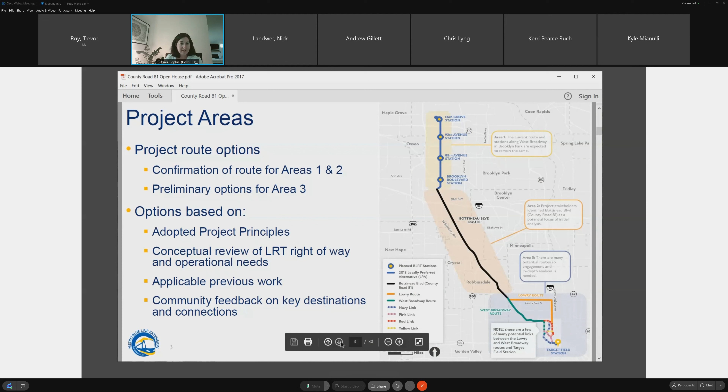The blue line is part of our overall metro system. If you get on a station in Robbinsdale or Crystal, you can connect all the way down to Mall of America, the airport, anywhere along the line, as well as within the blue line itself, or transfer trains to get across our region. This is part of improving transit for our region with fast, frequent, reliable service that you don't need to schedule for—just hop on and get where you need to go almost any part of the day.

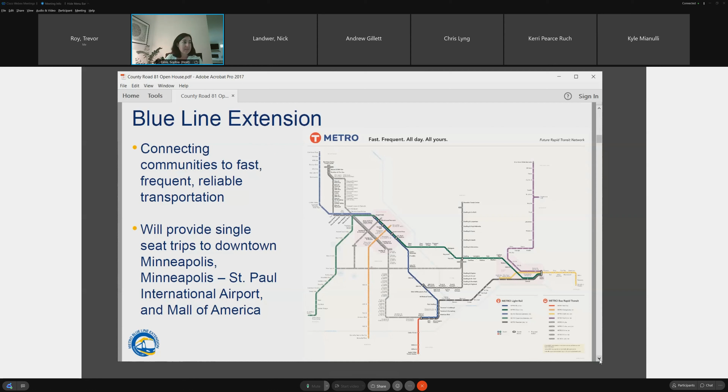So where our project is, we're in the process of identifying a community-supported alignment. Going back to that map, we had a project before, and after negotiations with the railroads stalled out, it was time to make the decision to move forward and find a new solution. That solution-finding path is what we're doing this year, maybe even into early next year.

But that doesn't stop our project development process. We'll still need a couple years to advance our environmental documents, clear and disclose everything along these new routes, and get plans ready for design and construction. Getting those engineering plans up to speed takes a little bit of time as well, and once we're in construction, it'll be another 3 to 4 years to build everything, test and install systems, and all that kind of stuff.

So if everything goes speedily through all of those steps, we had hoped to open the line in 2028. That gives an overall feel of what to expect. This year we're still working on the details, and you can expect us to come back for additional conversation as we go.

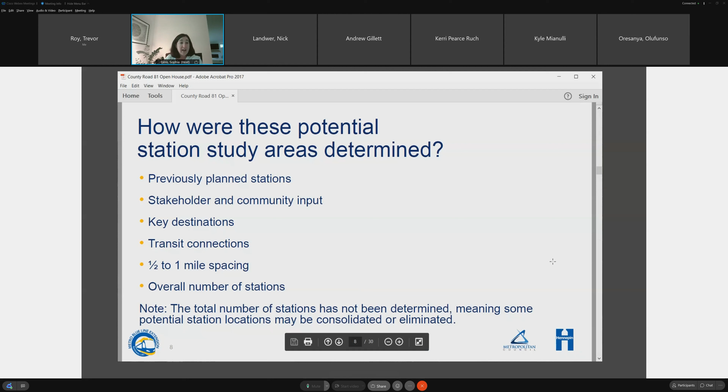The overall spacing of our stations is in that 1 to half-mile range. In urban areas you might space a little closer, and as you get further out you might space a bit further apart. And the overall number of stations, how that whole project fits together—the final number hasn't been determined, but we have our first blush.

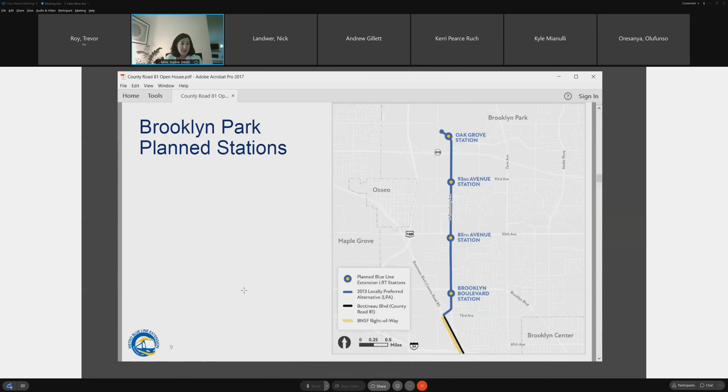I'll focus on our middle section, but want to give everybody an idea of what else is in the picture. Our Brooklyn Park stations on West Broadway can more or less stay the same—we can preserve that piece of the project as it is. We have 4 stations in that area that serve education, business, and residential areas.

For our discussion today, and the focus of why many of you are probably here, there are 4 stations proposed right now along County Road 81. You'll see on our map that some bubbles are smaller, where some of our station study areas are longer. We need about 300 feet to place a station platform, so there are multiple options or multiple locations where we might place some of them, representing the distance at which a potential placement would be.

So at 63rd, we're maintaining that station area and just placing the station. Same with Bass Lake Road and Crystal. In Robbinsdale, it's a little further from our previous station locations, but still very much the goal of serving downtown Robbinsdale and the vibrant business district there, as well as some of the denser residential that is in development. This bigger station block circle or oval is the main driver—destination is North Memorial Hospital.

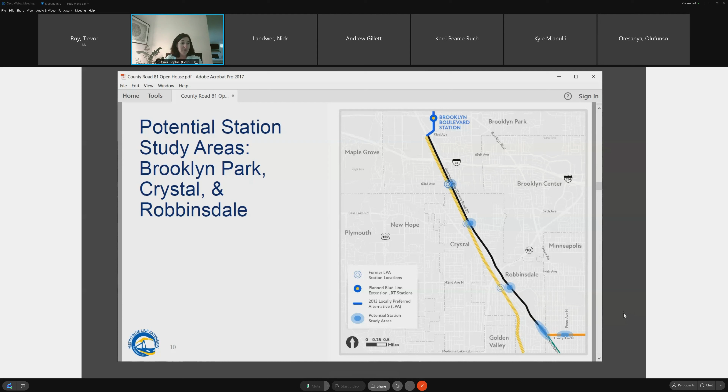In round 1 of the project, not serving North Memorial was what we heard the most about as a missed opportunity. As we asked the community where they wanted to go, serving North Memorial was the most mentioned thing.

I won't go into super detail for the Minneapolis area, because that's probably not why many of you are here today. But for reference, we're placing some stations whether it's on Lowry or the West Broadway route on Penn, or in the Fremont Emerson area, as well as a couple options as we get into our downtown areas.

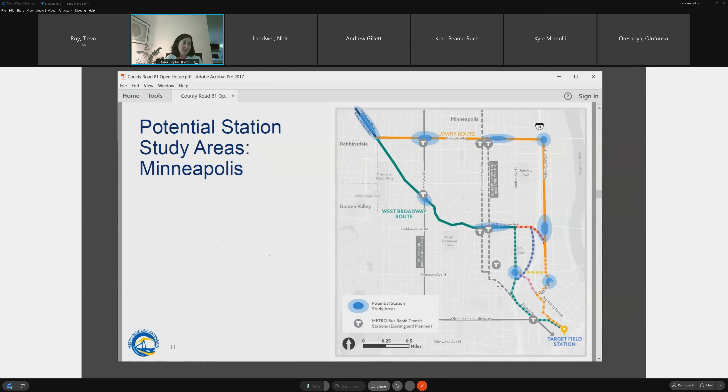So going from here, how are we going to evaluate these areas and actually place stations? It's about what best meets our project goals—not causing property impacts, reaching the most people, improving transit, what we hear from the public in conversations like this today, and the engineering requirements. How does that fit? How does it all work?

Some places are easy to place stations; for others there's a lot of geometry and things to consider. Obviously we're trying to reach what serves people best, if we can place stations to better serve people. Availability of right-of-way speaks to our project principles—if there's an option between placing a station that doesn't have a big impact and one that does, that's something we'd look at.

Does it serve the people of today, and will it serve the people of tomorrow? So the existing and future land uses—the more people that live or work by our stations, the better this line can serve our region.

So with that, I'm going to turn it over to my colleague, Nick Landwer, who leads our design and engineering, and he can walk us through the LRT visualizations. Okay, well, thank you, Sophia.

And as we get into this presentation, I just want to remind people that we pulled together these visualizations back in March.

We came out with route alignments to show where the potential routes were that we're evaluating and looking for to move forward into design. A lot of folks said, well, we need to see what this looks like. So we prepared these visualizations to show the context of how the LRT could fit within these corridors and what the impacts are.

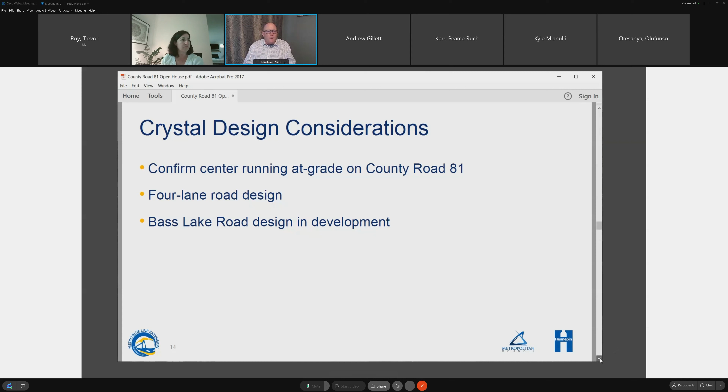Bass Lake Road is one of those intersections that we're looking at. It's a key one where there's a lot of traffic going through, and we're paying a lot of attention to how we make that operate efficiently.

So these are the visualizations we were talking about. This is an existing condition. On the graphic, in the upper right-hand corner is a picture of the roadway in that area, so you can see what the existing looks like. In the middle area, we rendered based on the dimensions out there on plans what that roadway looks like. On the left-hand side is a depiction of where it is along the alignment—you can see we're up by the Crystal Airport on County Road 81.

There is a narrow median in the middle here, and 6 lanes of traffic, 3 in each direction. We have a small boulevard on the east side of the alignment, and then there's a frontage road there. On the outside of the frontage road, there's a trail along the airport, which is just off to the right of this view.

We'll go to the next slide and look at what the impacts are. This shows again the center running at-grade light rail—this is the guideway in the middle. We're able to maintain 2 of those lanes of traffic on either side of the guideway, maintain the boulevard on the east side, and continue to maintain the frontage road through here and the trail on that east side of it.

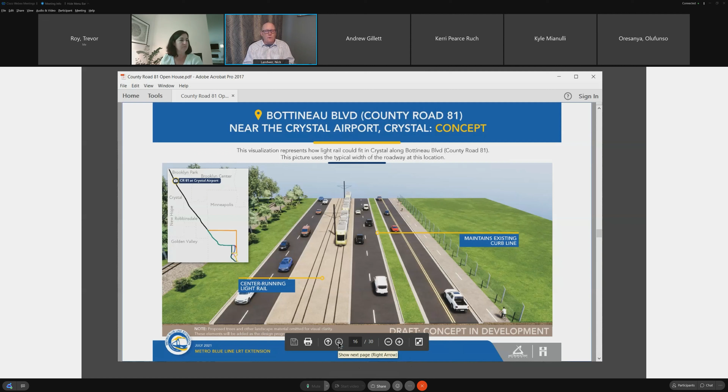One thing to note here is as we're going down the middle of these alignments with the guideway, we can pretty much maintain the guideway and those two lanes of traffic in each direction within the existing curb line that's out there. So that puts some context of how this fits within the existing conditions.

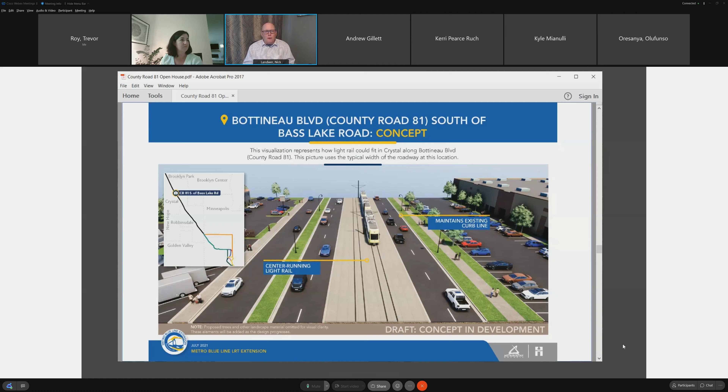This is the impact with the center running light rail at grade here. We continue to maintain four lanes of traffic, two lanes in each direction. We're able to maintain the trails on the outside, and we're also able to maintain the frontage road on the west side, with very minimal impacts to the businesses along here in this rendering.

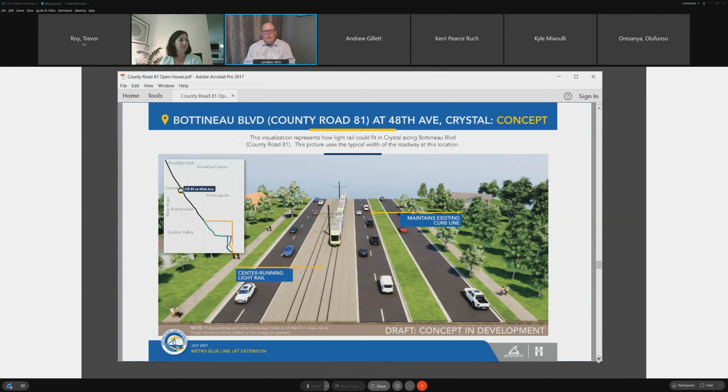With the concept we're showing here, this again is a center running light rail at grade. We're able to maintain those four lanes of traffic pretty much as in the previous two, maintain those existing curb lines that are out there today, and maintain the trails on the outside on that frontage road.

Moving a little farther south into Robbinsdale, some of the design considerations as we get into Robbinsdale - it's more commercial there, more their downtown area. We want to confirm that center running at grade on County Road 81 works well and is compatible with how that downtown area operates. We want to maintain those existing intersections, in particular the intersections at 42nd, 41st, 40th, 36th, and 35th that are in Robbinsdale, maintaining the full function of those and access through them.

We want to really focus on safe pedestrian crossings and that pedestrian environment. One of the things we're hearing from folks is there's a concern that the light rail could divide up the community and make it less safe. What we want to do is focus on making it pedestrian friendly to get to either side of County Road 81 in this downtown area, to provide safe pedestrian access for crossings, and to get our customers to and from stations safely and efficiently.

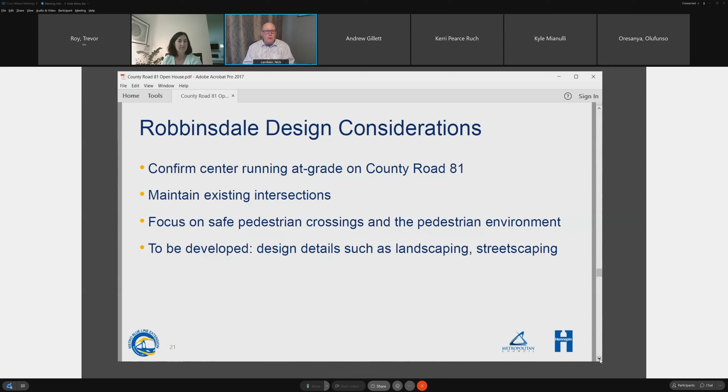Again, I want to remind that there's a lot of design details we need to continue working on as these plans develop. When we get into more of an engineering phase, we'll focus on the details, not only the roadway, guideways, and utilities, but we'll also look at landscaping and streetscaping and how that fits within the project.

So this is downtown Robbinsdale, just south of 41st Avenue, where the picture would be standing above 40th Avenue looking north. You can see on the left-hand side of the screen is Town Center with a retaining wall on that side, with parking above it and parking below it also. There's a trail or sidewalk on either side of the roadway, a median in this location, and two lanes of traffic in each direction - a four-lane road existing here.

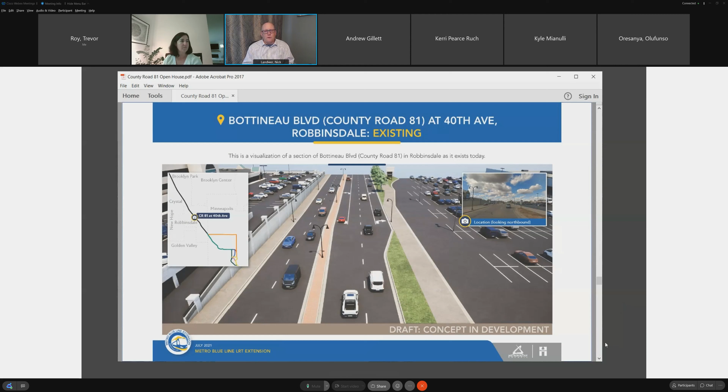This also shows the turn lane movements as we're going to 41st and that intersection. And on the right-hand side of the screen is Robin Center, that parking lot showing in that location for the business there.

As we come down into the concept for the center running at grade, we're able to maintain the trails on either side. In this location, we're holding that wall line at town center. Depending on how grades work through here, we need to flatten things out a little bit for the trains so we get a decent grade.

We may need to reconstruct the wall on the left side, or west side, of the screen. But we held that line to keep the roadway, so we're able to maintain the pedestrian sidewalk on that side of the road, the 2 lanes of traffic in each direction, and the functions at that intersection, the left and right hand turn lanes.

On the right side, or the east side of the screen, we maintain that pedestrian trail on that side also. There is some encroachment into the parking lot for Robin Center, and that's something that, if we have impacts on properties, we'll work with property owners to mitigate for that work and see what we can do to help out or replace that parking as we go through.

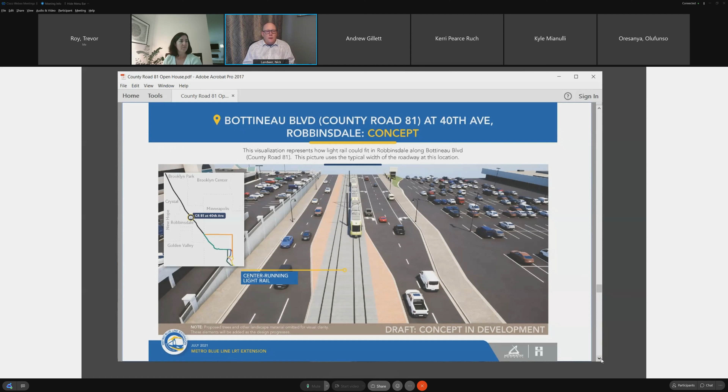One of the things that's been asked of us is, would it work? Would it be more efficient if we went on a structure through here?

So we were asked to take a look at what a bridge would do through this area. Some of the questions we ask—usually when you put in a bridge, you're trying to address a physical or geographical issue, a river crossing, going over a highway, or some substantial grade differences. But with the center running light rail, that train is running with traffic, so it doesn't impact the intersections or those intersection operations that much.

One of the things we were asked to do is take a look at what a structure would look like, and this structure could be along the whole alignment. But as we can see here, even if we put the train up there, we still need a guideway out there. That guideway is about 28 to 30 feet wide, and it would continue to need to be about that wide even if it was up in the air. So those are the impacts of putting it up there.

What we did find, though, is with the geometry of where you need to place the columns to hold the bridge up, and how they're placed crossing intersections, and again with turn lanes, a bridge really doesn't save us a lot of room on the roadway. It doesn't get us back a lot of space, maybe a couple feet here and there, but it's not a substantial difference from what has to be there, to protect those columns, give them some clear zone, and with left turns and those left turn shadows that increase the median size.

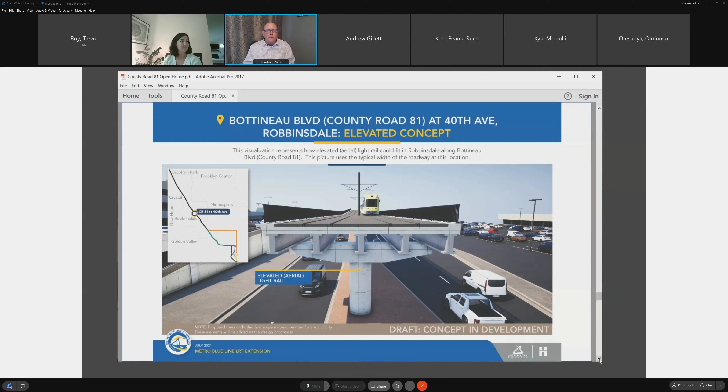This is the concept of how the light rail will fit in there. We use a little bit of the space in the boulevards, and we use that median space for the guideway. We're able to maintain the 4 lanes of traffic through here, and we're able to maintain those frontage roads on either side and the parking over there also.

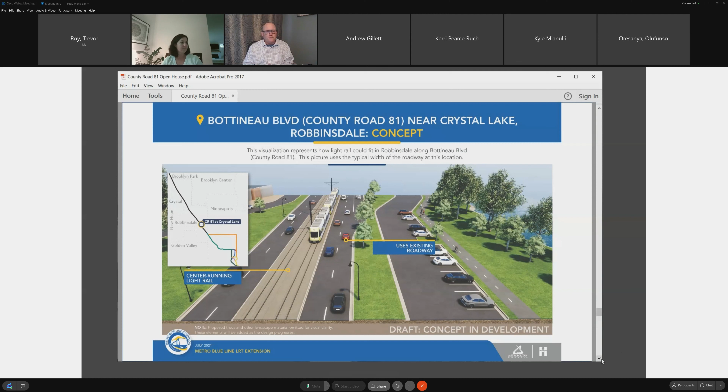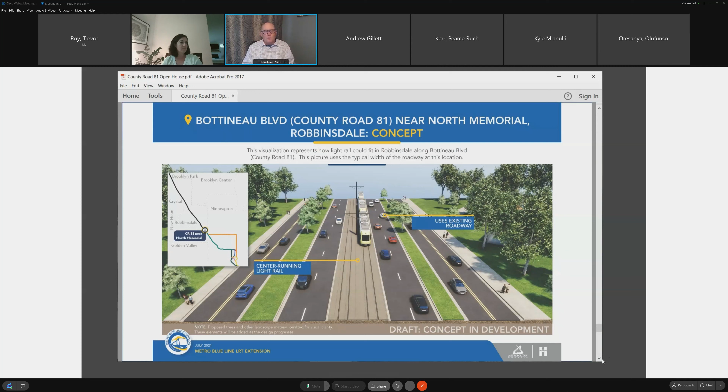One of the initiatives we're working on as we roll out our project design is making sure we're building community wealth within the communities as we move forward with the project. We've heard concerns about anti-displacement, whether economic impacts or other impacts of the project. So our project is forming an anti-displacement working group that will work parallel with the project to help address some of those needs and issues we're hearing from the community.

We want to make sure we're developing and implementing comprehensive initiatives and strategies to help with that. We want the investment of the project to build on and support the existing community and assets that are there. We want to benefit existing corridor residents—this isn't just for folks in the future, it's for the folks living here now who will be living there through construction and to opening. We want to provide more opportunities for equitable housing, employment, businesses, development, cultural experiences, and other day-to-day life activities.

Knowing that as we're constructing a project there are impacts to the community, we want to make sure those impacts come with benefits. We want to benefit the community through that construction and those impacts. Right now we're going out for a facilitator for this anti-displacement group, who will help put together their charge and how they will operate and work with the project. Proposals came in on the 27th, two days ago—three proposals have been received, and those are being evaluated right now as we move forward. That's a key initiative as we're rolling out this project.